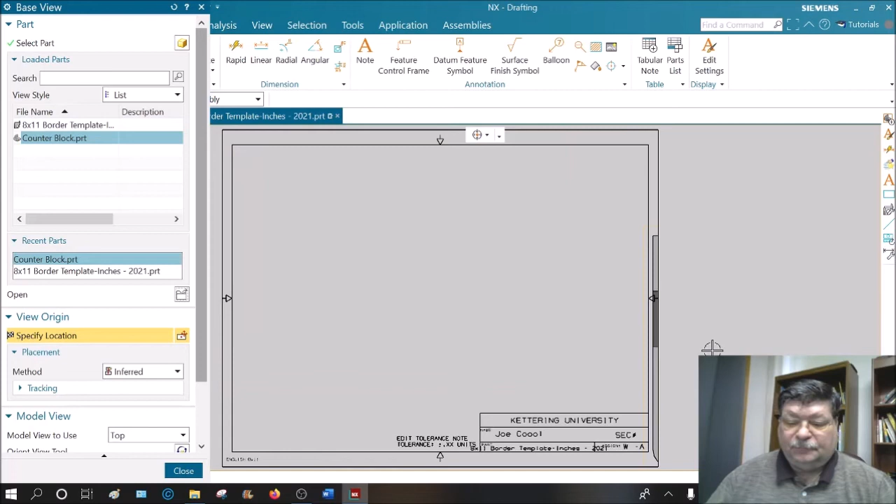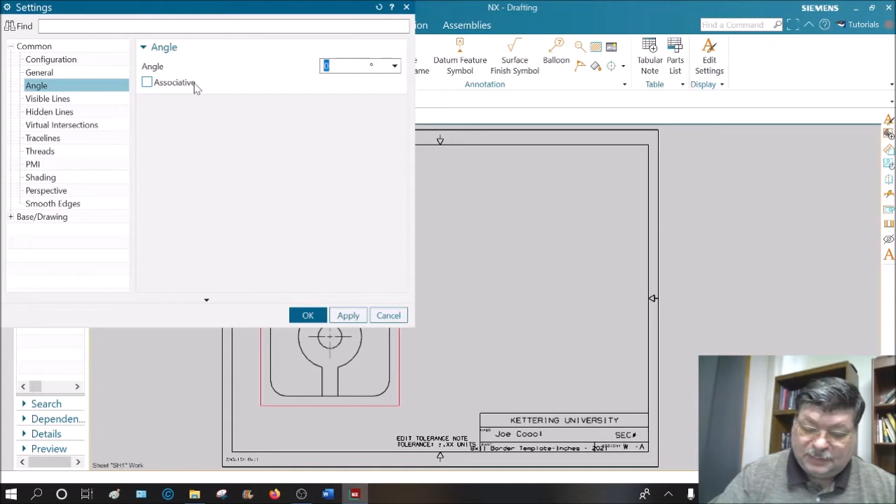Now it's vertically oriented and a little bit too large. I'm going to click to drop it, escape out, then I'm going to double click on the boundary here and go to angle, rotate it clockwise, which is -90 degrees, and then I want to make it somewhat smaller so I have room to put all my dimensions on it.

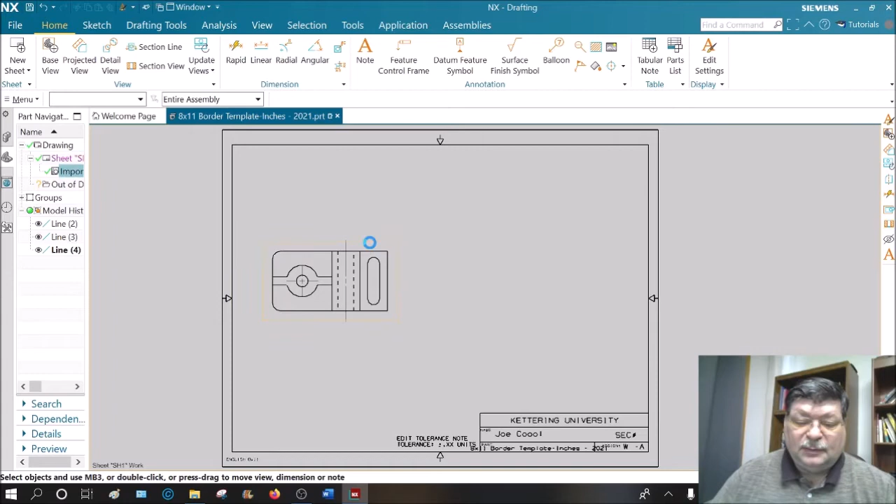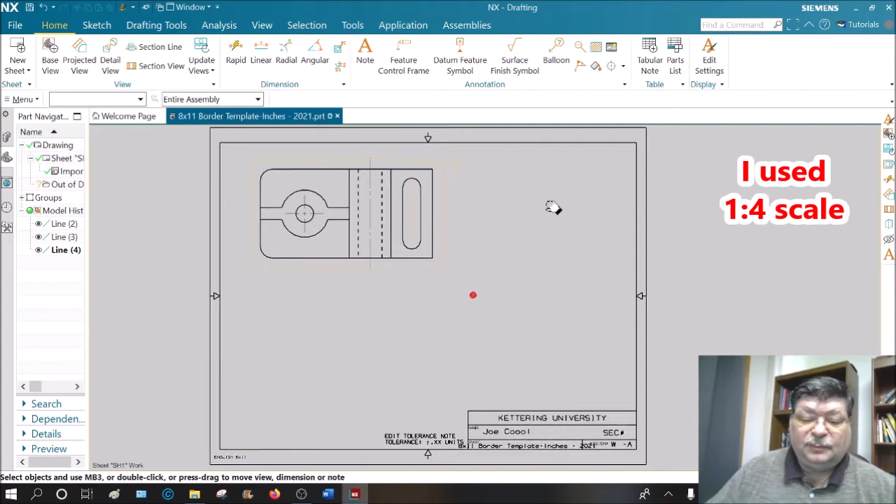So we'll go to general scale. Let's try 1 to 2. That's too small. So we'll go to the ratio setting and pick something in between. You can always scale it down after you put dimensions in, unlike in previous versions of NX when that'd mess up all your sizing. So that's the size we want.

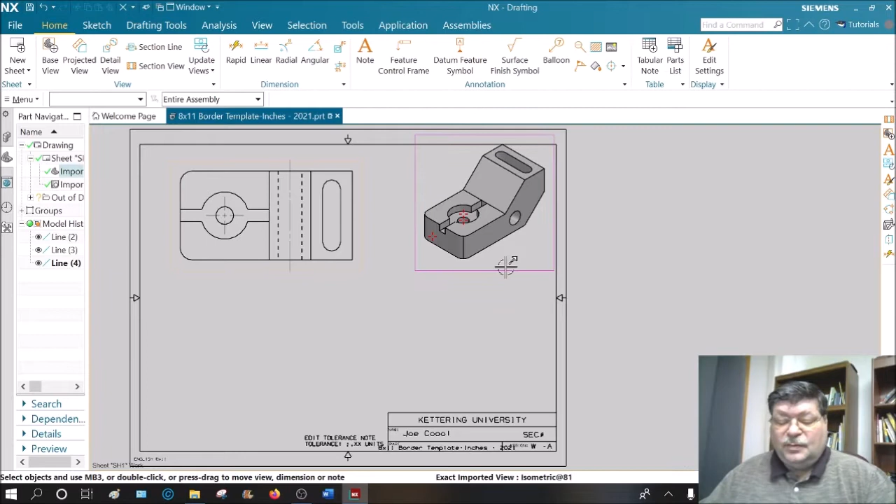Just for chuckles, we can bring in the isometric of it, and to get the center lines off, click and drag a box around the whole thing, hit your delete key. There we go. You may notice at times that you get these edge lines that really shouldn't be there. There's no corner or anything there. You can delete those by right clicking and hitting the little eyeball here, the hide symbol. That looks a little better. You could actually do that to any of the lines.

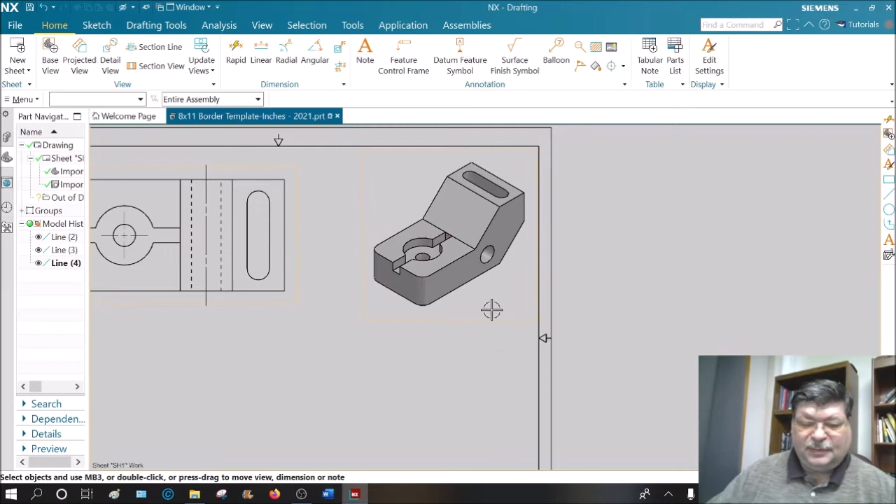Normally the isometric comes in fairly accurately, but there are some problems depending on how you create the part. At times you may or may not get a line and a curved edge. It comes in with center lines. This center line is not quite big enough. Let's double click. We want that center line to be as large as the counter bore.

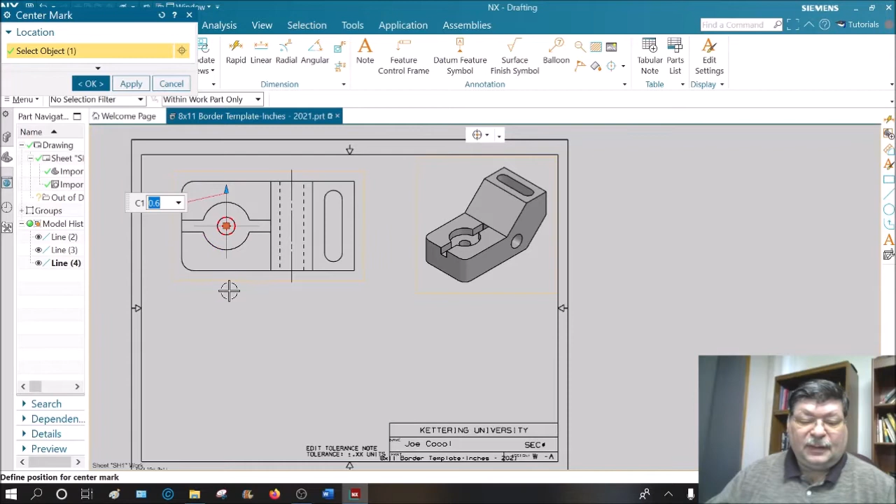And there are no center lines on this slot because it doesn't put center lines in for arcs. So we're going to go to the center line command, go to center mark. You can do more than one at a time. If you do more than one at a time, it connects them. Okay, so there we go with that.

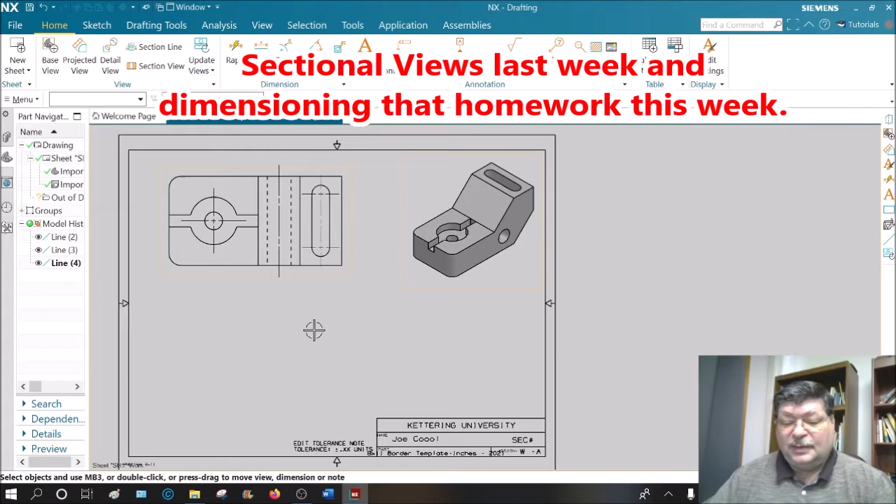And now, since this is a sectioning chapter, you always want to figure out when the part is done, what's the fewest number of views and the best views to use to show this in order to dimension it. If you don't know, you can put a bunch of views on there, use the best views to put your dimensions in, and any views that you didn't need to put dimensions in, you can delete them afterwards.

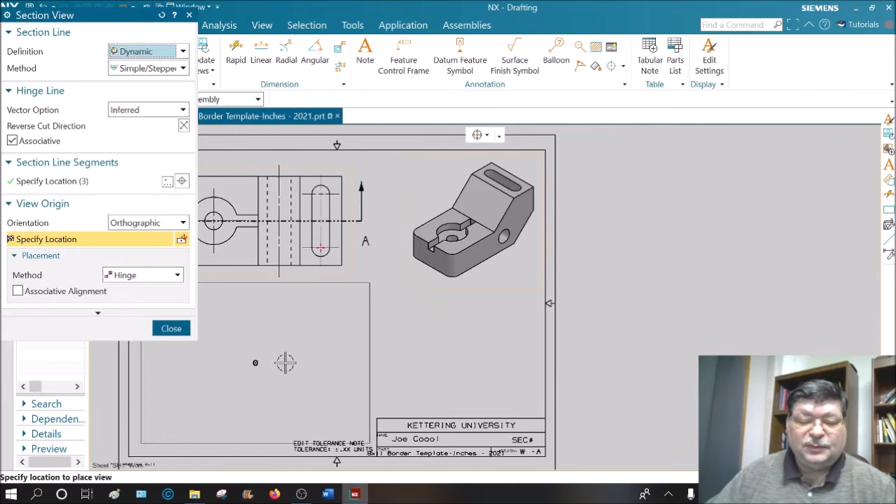We're going to go to the section view command and just put a full section through the whole thing. Click to drop it down here. This shows my internal parts and my external. You're not supposed to dimension to hidden lines, so no hidden lines in this view. Let's move this down a little bit.

Here's my tolerance note. The tolerance note was put on your template to remind you to put a tolerance note in. So let's double click on that. Let's get rid of the top here. We don't need the edit tolerance note reminder. And the tolerance should be no preceding 0 for inches, as explained in the video on the basics of dimension placement.

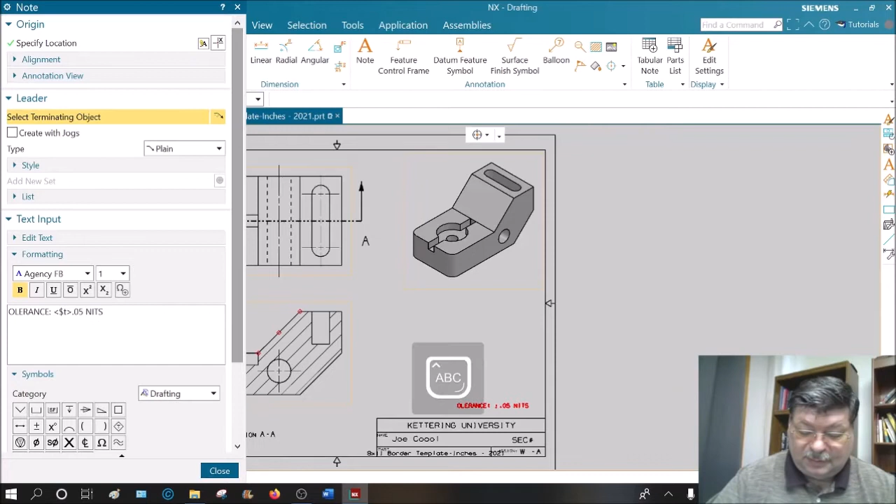Typically with inches we have 2 significant digits, and this shouldn't say units, it should say inches. So there's a good way to put a tolerance note in. The letters for the cutting plane line should be near the arrowheads.

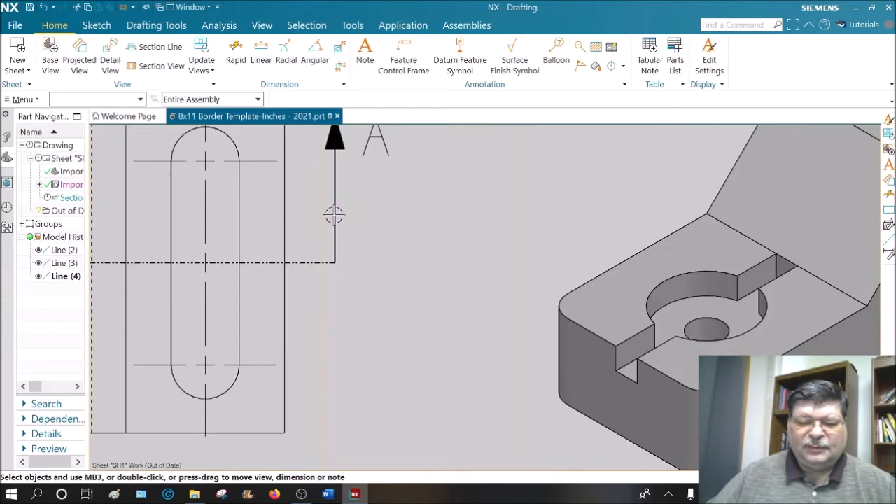And you can move it if the arrowhead gets in your way. You can double click on it, and that little yellow dot there, you can click and drag it and move this in and out, so get it away from any other dimension lines. There's a way to shorten the arrowhead too. I forget, you might have to double click, right click, maybe go to settings, probably in there somewhere. Lots of changes you can make. We might come back and move this if it gets in our way.

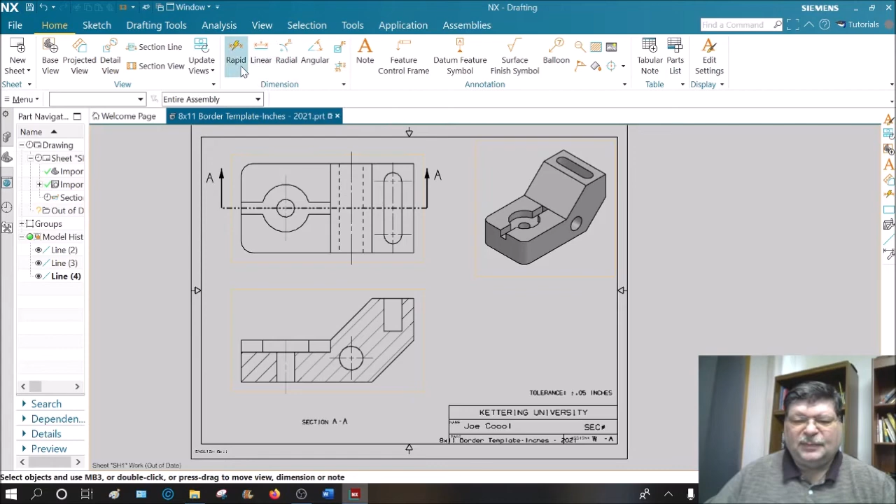Okay, let's put some dimensions in. So we should start with, here's our rapid dimension. A rapid dimension will do a normal linear dimension that's horizontal or vertical. It'll do angular or radial or diametral. It'll do all of these depending on what information you give it. Sometimes it won't want to snap or click or give you the correct one, and then you'll have to force it. So there's a couple ways to do that, but we'll use the rapid most of the time here.

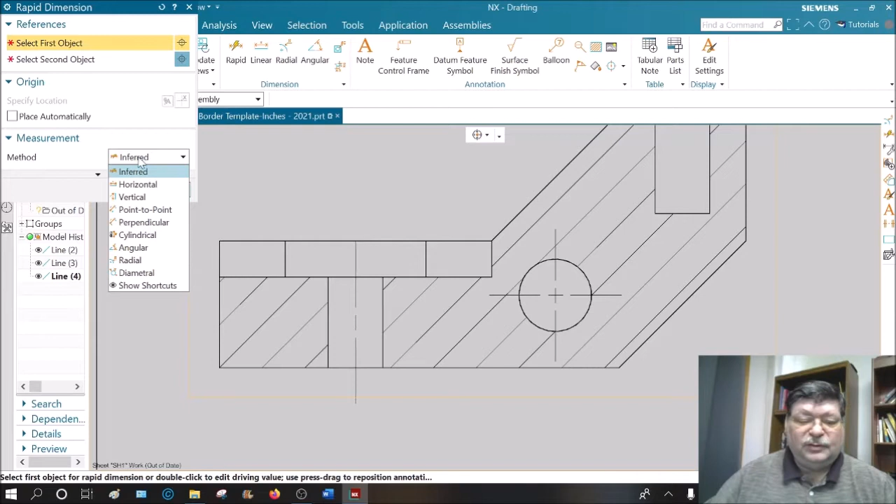Okay, we need to put the height here. So it's on diametral by default from last time I used it. This should be on inferred. Okay, this is how you can change it if you want a radius, even when it's trying to give you a diameter, then you can change the method here. Usually you want it on inferred. So I'm going to click here and here. You click where you want the gap to start. Okay, the gap size length has already been predetermined.

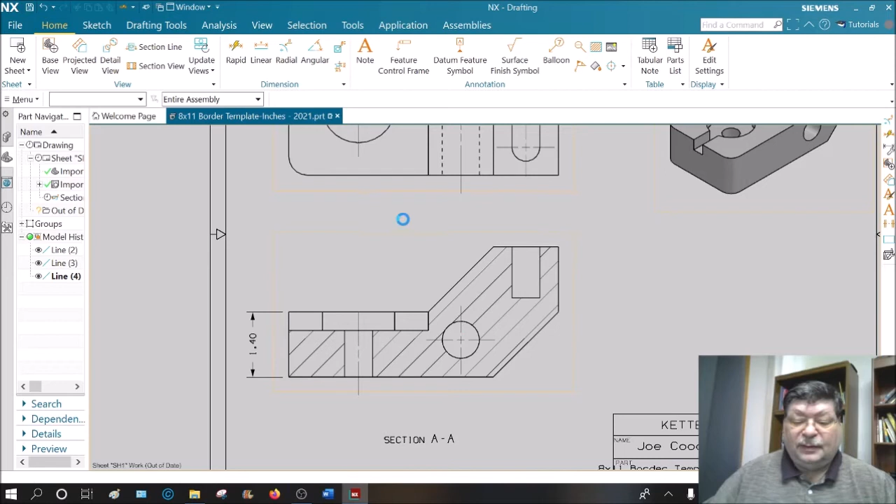We're not going to put the height of this counter bore here because we're going to put it in the note on the top. This just happens to be the same height, 1.4 inches is over there. This corner is at the same height as there, but we don't put it there. No, we don't make assumptions with dimensioning. So that's the height there. We do the length of the bottom here.

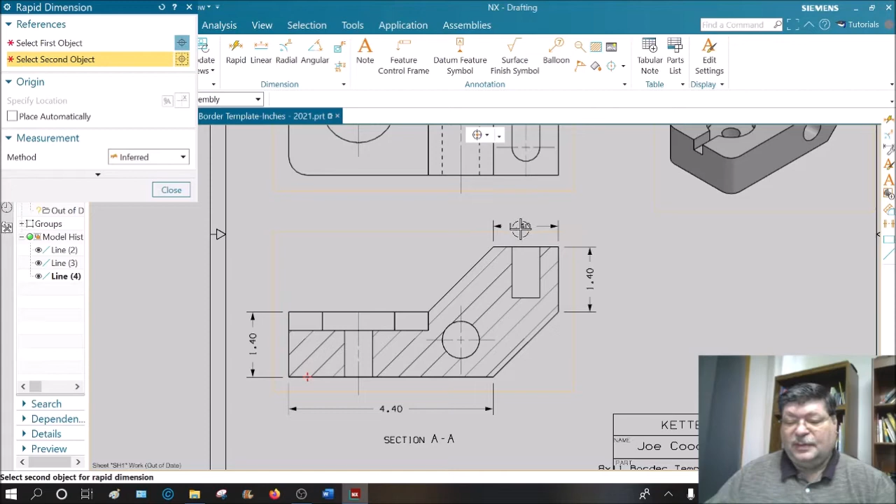Now to do an angle, you can either identify both edges of the angle, and that identifies where it should be, or you can do the length to one edge and then do an angle of that line, and then you wouldn't need the top dimension here. Let's see, we also need one here. I would put this dimension in instead of across the top view, because this is on the contour where you can easily see what you're actually dimensioning across. And we need a dimension across here.

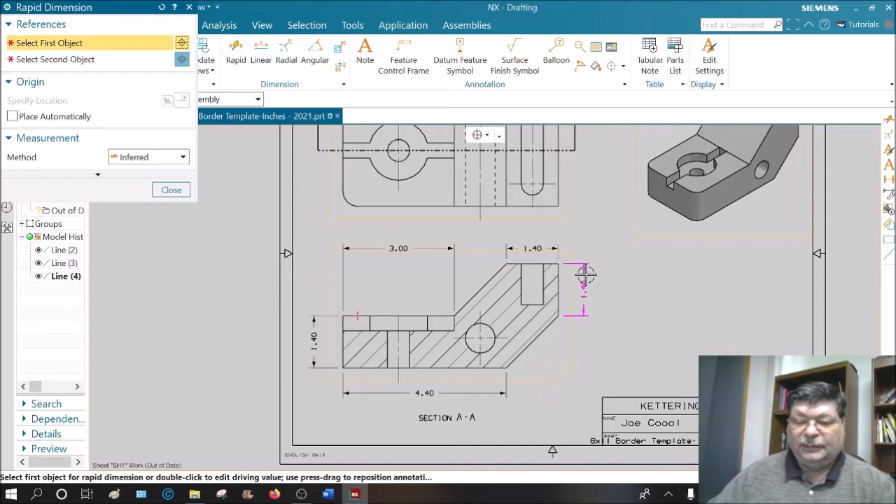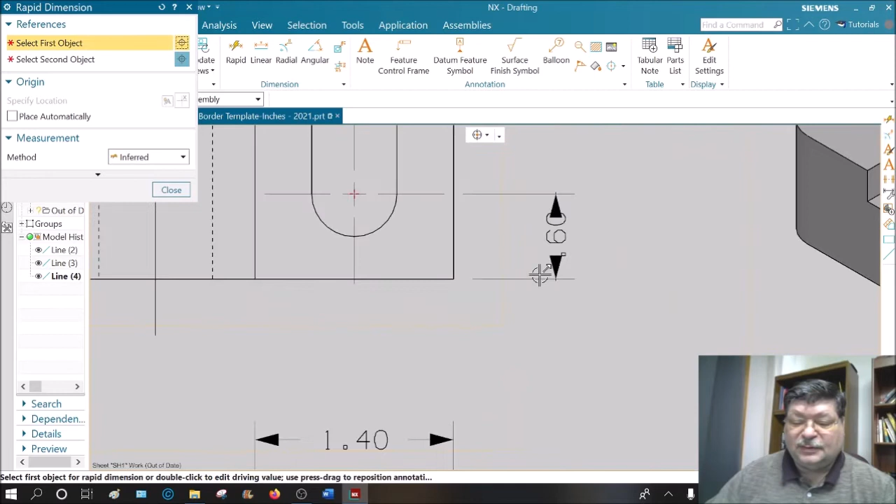Usually these dimensions are lined up, so if you go over there, you can click on that, not click on it, it'll automatically link to it, and then you can move your dimension back. Usually you want the dimensions lined up unless you need more room, but make them neat. Remember, dimensions are there to be easily read and understood. Remember, you're locating and sizing every feature, so the slot here we have to locate and size it. So we're going to locate it by arcs; centers of circles are always located to the center of the circle. Okay, that dimension is a little crowded there. We'll come back and edit that later.

Go to the center line here. The center line is also on the midpoint line, so either one will work. Again, that's a little crowded, but we will come back and fix that later. We could then go from, we have to know the other point here. So there we go. Now notice this window comes up. This is like a small editor. And it comes up when you just hover for a few seconds, and then you can add features to this. Just ignore it if you don't need it, but if you want it, we'll get to something when we need it in just a minute here.

Okay, we also want to locate the center hole here. Now, this hole looks like it's centered from top to bottom, but we don't take anything for granted. So let's go from here to here. This isn't exactly how it was dimensioned in the book. They said 0.2 between the center line and this edge. Remember, in the book they were just giving you enough dimensional information for you to model it. So we're going to go from the outside edge to this edge line, and then from the outside edge to that line. Subtract the two and you have the distance across.

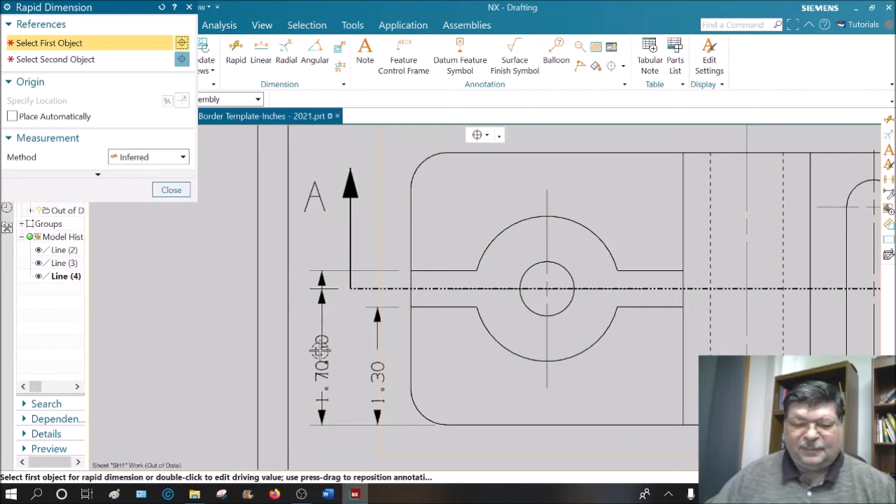I'm just going to drop it in here anywhere. Sometimes it doesn't like to, it wants to click on some other dimension. If you just drop it somewhere, you can move it later. There's a way to turn off this snapping function, but I'm not sure where that went in these later versions. So just zoom in and be careful with it.

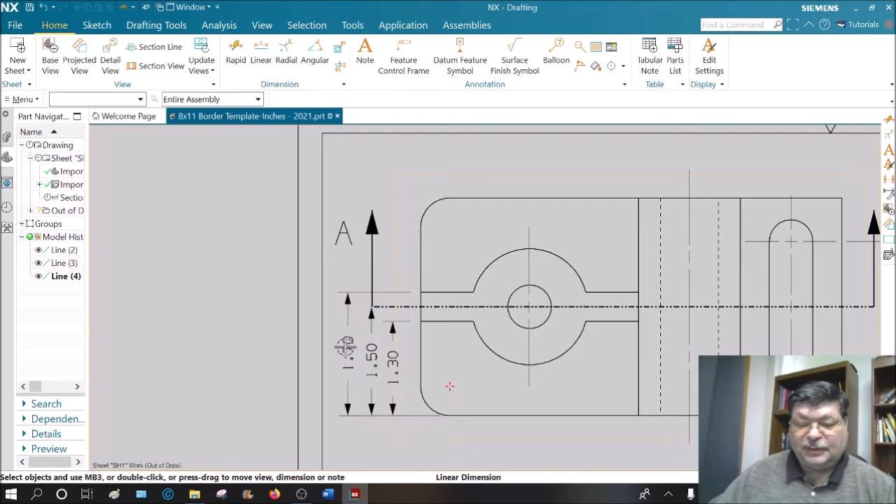There we go. Usually the text is centered between the arrowheads. The first dimension out from the side should have some room, shouldn't be crowding the object line. Then you should stack the other dimensions, fairly close together, and be uniform in their placement.

We actually have 3 lines here and 3 gaps, and this extension line is too close to that arc. If you zoom in, you can see the gap, but when you print it out or zoom out, it looks like it's touching. So we're going to fix that right now.

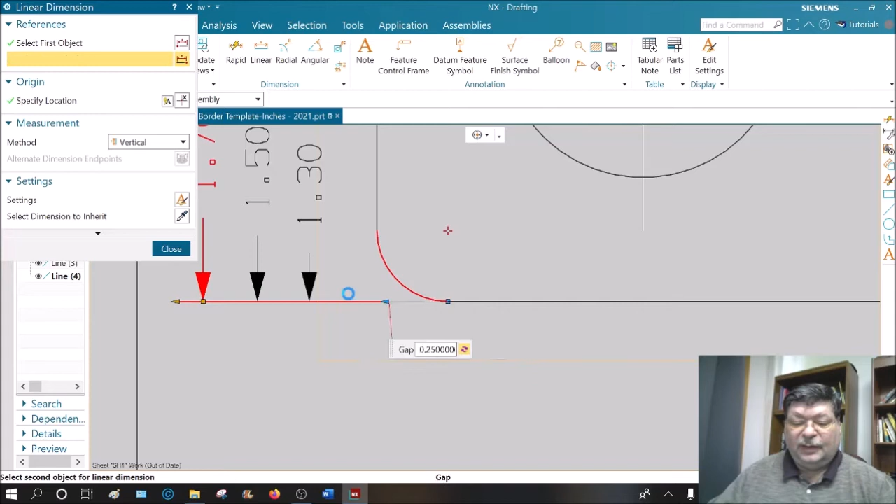We're going to double click on the line, then click on the square dot here, and then you can take the arrowhead and move it out. We're just going to move it out here because there's another line underneath it. We're going to do the same thing for the next one: double click on it, click on that, and just click on the arrow.

I love these editing features that are graphical.

The last one is there, and we're going to double click on that and click on here. Now really we don't need to move both. If we move this one out, it moves the other one too. We don't want to move both.

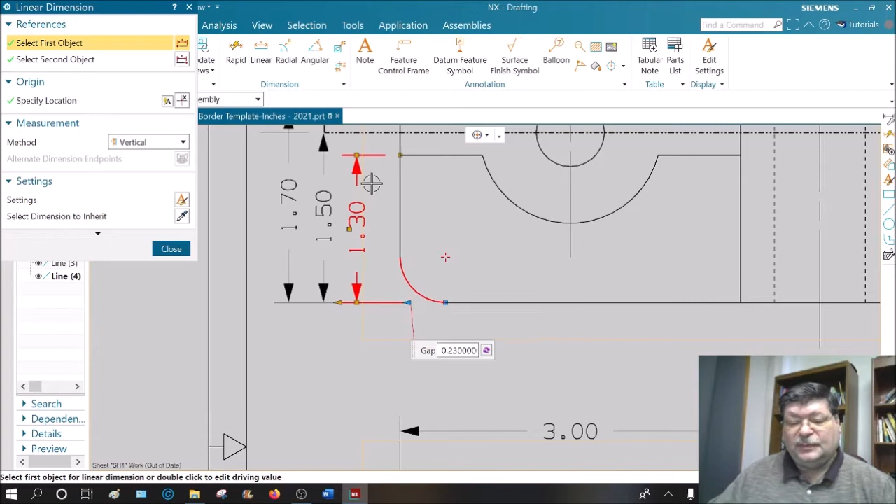So there's this thing here where the gap has a synchronize both sides button. You want to turn that off. Turn it on, turn it off. Okay, and then it should just move one side, so that the gap here from the curve looks about the same distance as up there. And then you can close that.

So it's nice to be able to edit that in real time. What is that line there? Oh, okay, why I did that. Let's double click on that.

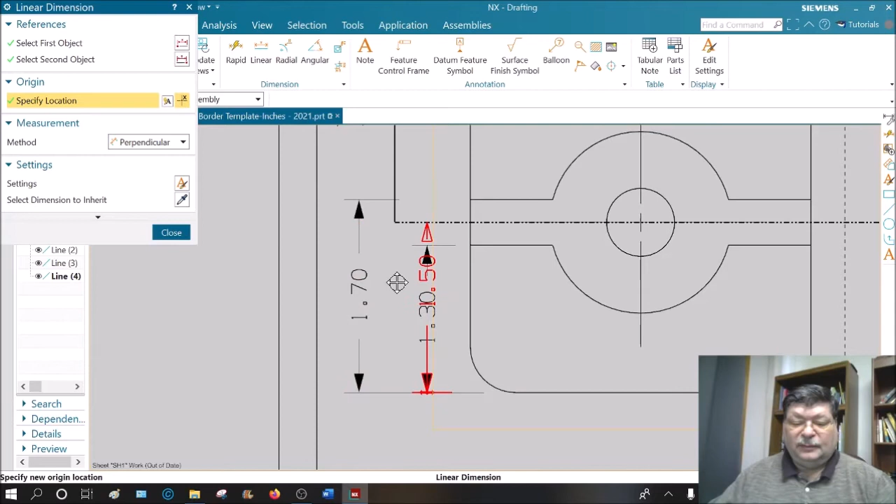Don't know why that moved that way. I'm just going to delete that line. I don't know if I moved it. Oh, I see. Okay, I'm just going to delete that and put it back in. Sometimes the easiest way to edit something is just to delete it, especially if you don't know how you messed it up to begin with.

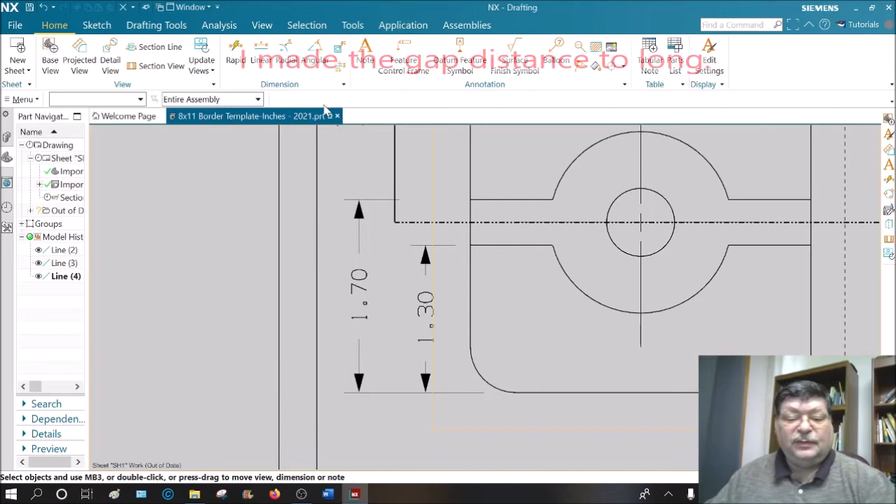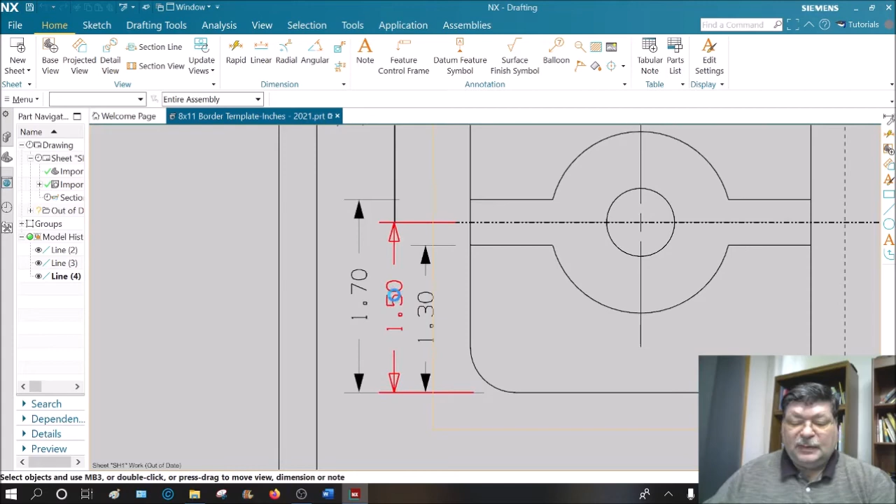So let's try it again. Let's try there to here. And we got to move that one. There we go. Neatness counts, people. Neatness counts. Easy to read, easy to understand.

Okay, we need an overall dimension. You start with the smaller dimensions and you keep going outward until you get larger and larger, until you get an overall width, length, and height. So do we have an overall height? No, we do not have an overall height yet. So let's go from here to here and give it overall height.

Oh, I'm missing a center line here. So let's go to center line. That's a 2D center line. We can go from curves, okay. Pick 2 lines, it puts a center line down between them. Don't let that center line hit text - if you need to move it, shorten it.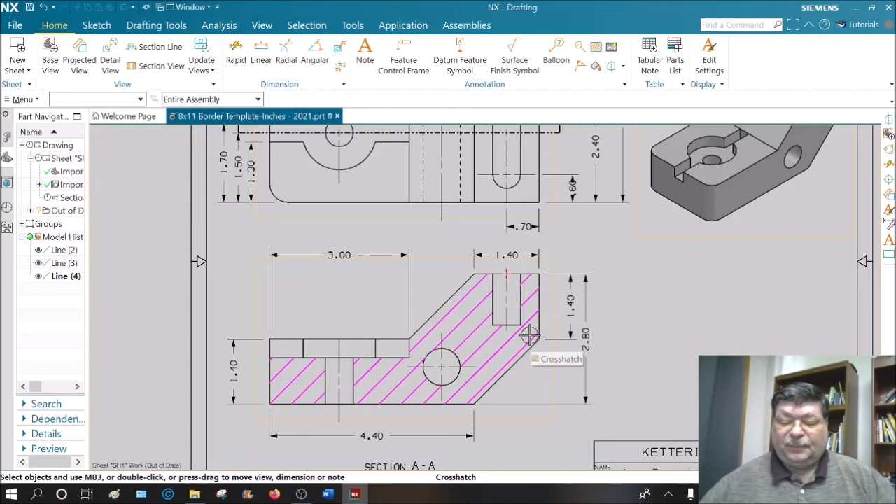Okay, we need to size and locate this hole here. So let's locate it. Highlight the center line and this edge. We'll drop that dimension in. And then the height of it, typically you take the dimension and move it out to the nearest outside edge, instead of dragging it all the way through the part over here. That probably wouldn't be too busy either.

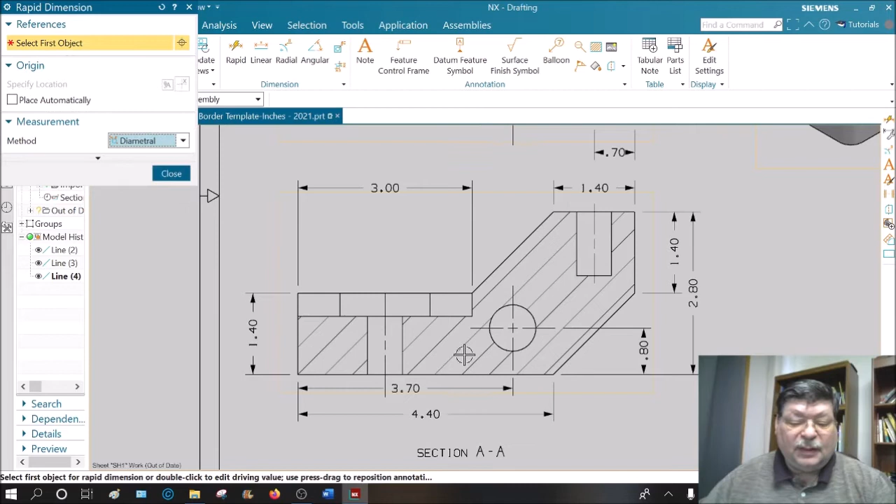And then we need to size it. So to size it with a rapid dimension, if you just click on the arc, it should do a... I'm going to go diametral. Usually I like to just have a leader line pointing in and not a diametral line pointing across, because if you get several of these things in one spot, it looks kind of weird. Let me try that one more time. Diametral inferred - okay, that's what I usually want right there.

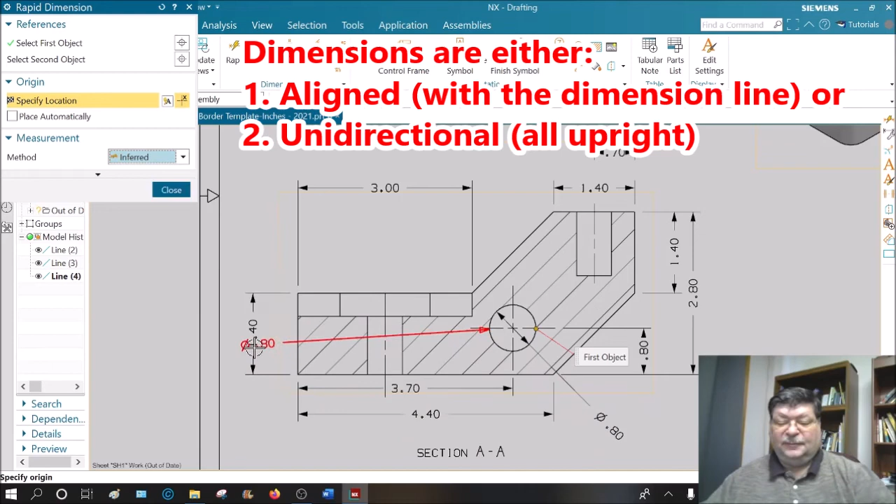Now I'm going to show you how to use this little editor here. By default, your text is either unidirectional, which means it's all upright, or it's aligned - vertical text, horizontal text dimension lines, and the text is horizontal or vertical like this. If you have vertical text over here, then it's angled, so the bottom of the text aligns with the leader line too, and we want to straighten this out. So we're going to go right here to text align and make it horizontal text. There we go.

Click to drop that, escape out. We can delete this one then.

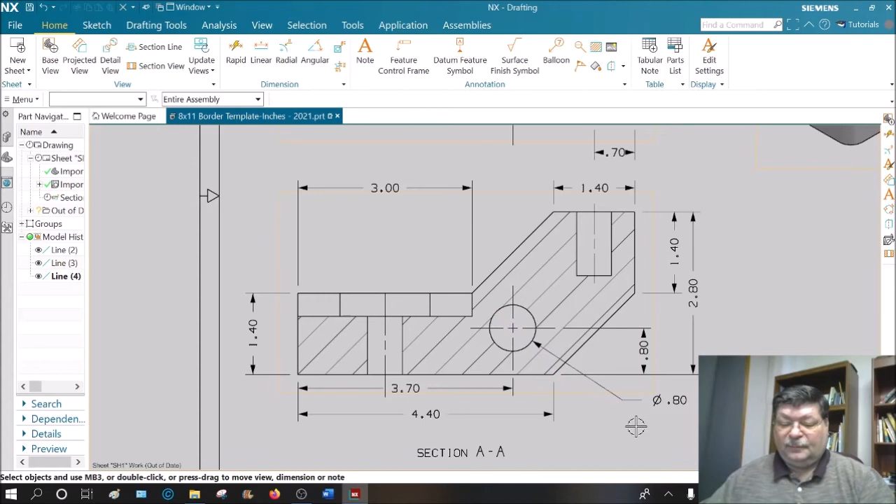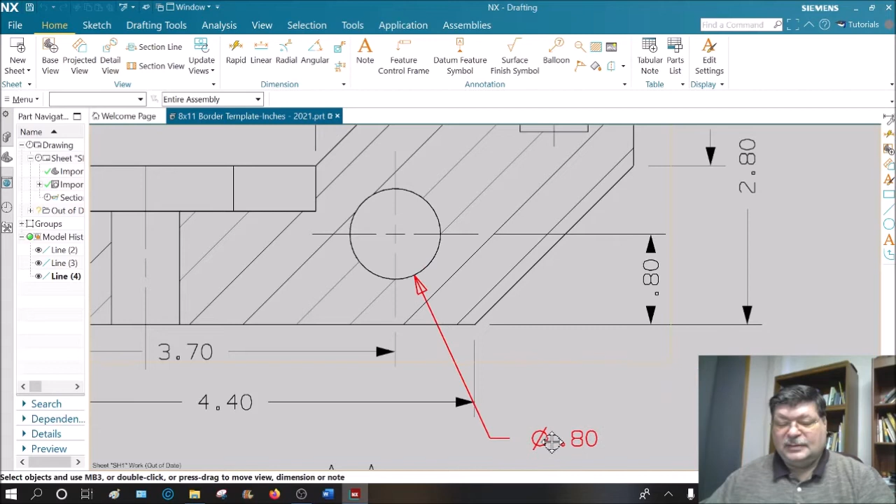My little stub line here, maybe I have that adjusted too long. If you double click on this, you can click and drag this in, but where it's set is okay. Remember, your leader line can cross an extension line, but it's not supposed to cross another dimension line. Put it somewhere where it's easy to read. There, we've sized and located that hole. We have not sized this slot yet, so let's do that.

Let's click. Do we want a radial for that? Yeah, let's do a radial. And then we want to go up here and straighten it out. In front of this radial, hover for a second, go up here. In front of this is the text. The x.xx represents the text. And we want 2 of these, so 2x. If you need more significant digits, you can change this value.

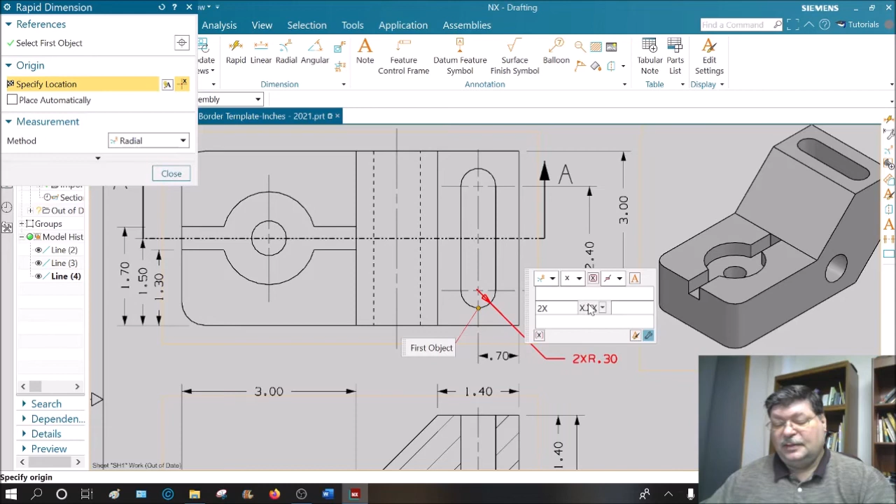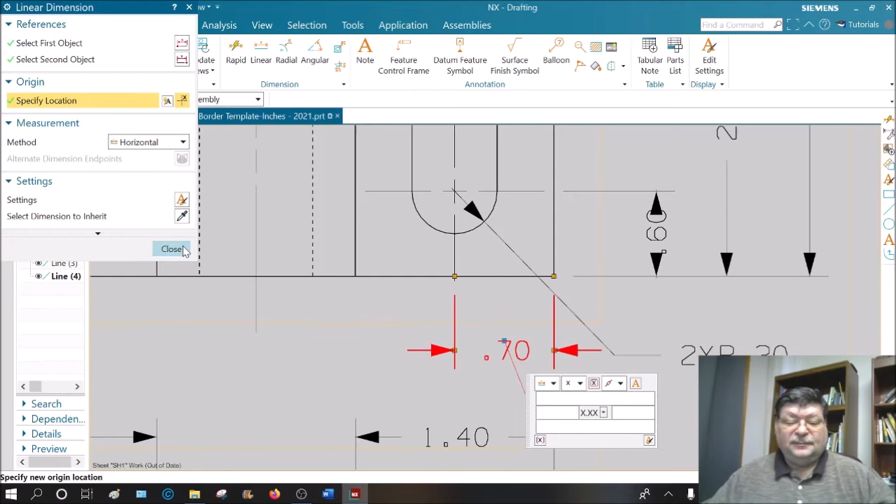Now let's make this a little more legible. There's 2 ways to do this. Double click on that text. You can either right click on it and say text or arrowhead orientation out. That gives you a little more room in between the extension lines. Or you can click on the text and move it outside. Typically, if you want to move it outside, you'd have the arrows inside though. Okay, so since I have room inside, I usually like my text inside the extension lines.

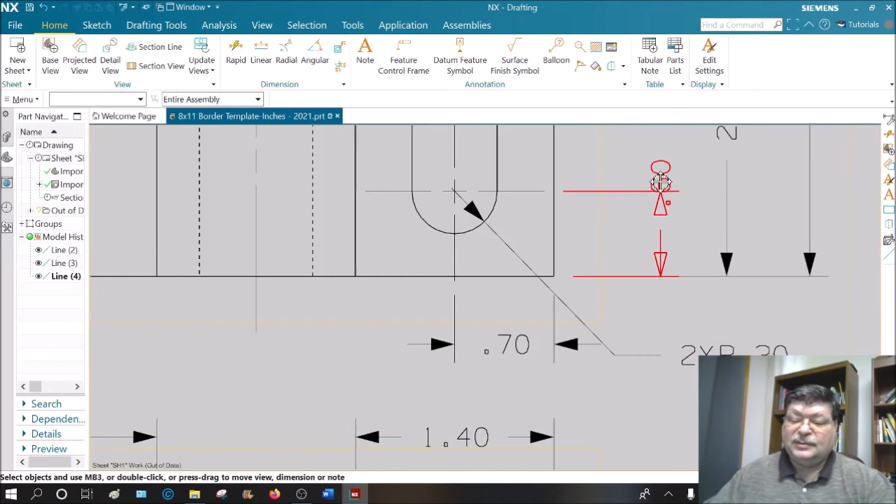Same thing for this one. For this one, the other option is to take and move it to the outside like that. That's okay also. Okay, now we can move this in a little bit. Move my text nice and neat. Move my arrowhead where I can see it.

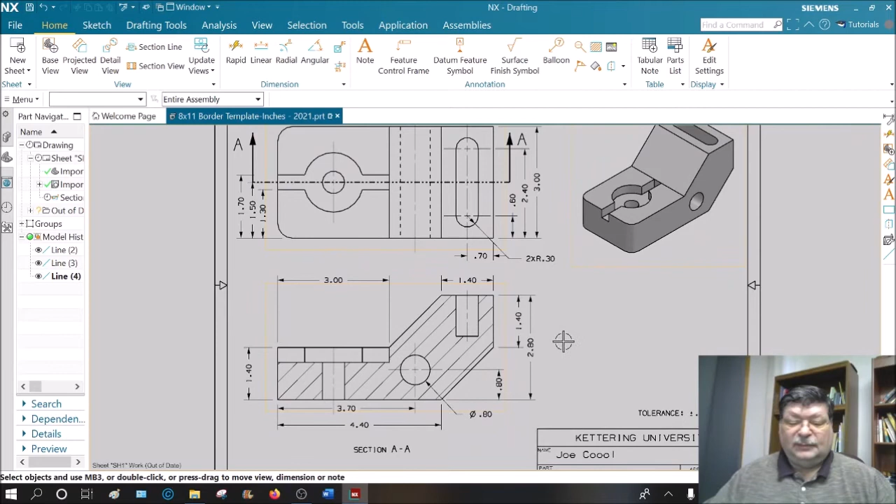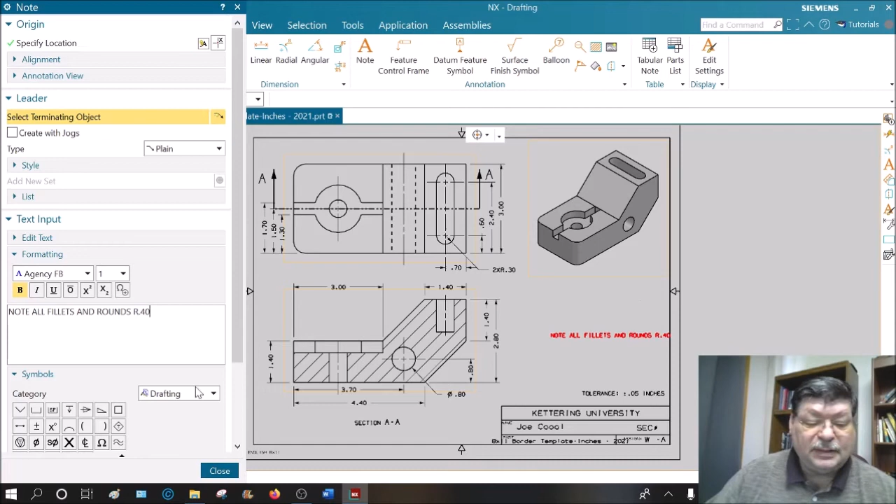Am I missing anything? Is there any feature that I do not have there? Oh, okay, the only thing I don't have is these arcs here. So instead of dimensioning it, I'm going to put a note in like they showed in the book. And the note is going to say, all fillets and rounds, radius 0.40. I think that's what it was. Let's say that's what it was. There, so now you have a note.

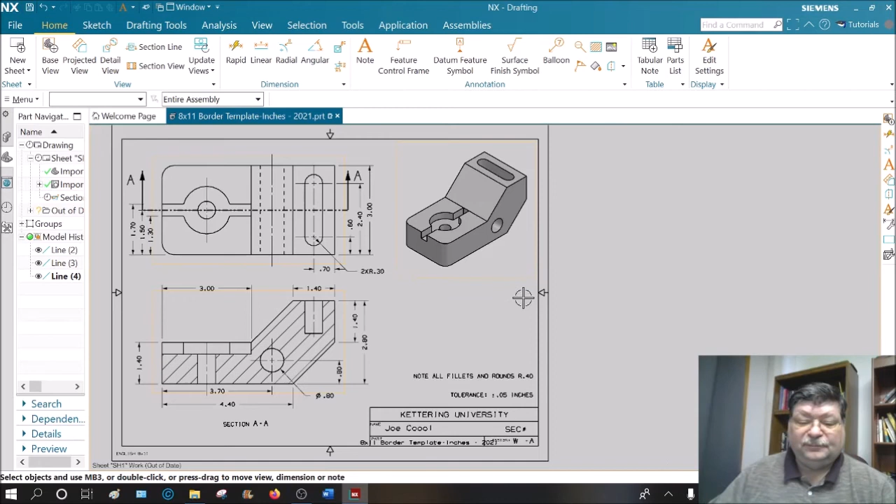So a fully dimensioned drawing shows pictures, shows dimensions, shows notes, shows tolerance notes, and anything else about the part that you need to let the person know that's going to build this thing. Like if the part has to be made out of a particular material, like aluminum or stainless steel, you'd put the type of steel, material, and list that. If it's painted or has decals applied, you can even tell what the font of the letters on the decal are. Okay, so anything that the person needs to know should be on this drawing. This is a working drawing, a legal document that should be complete in and of itself, or reference other sheets it may need. So that's what your drawing should look like.

Yep, I'm going to move this dimension down a little bit. That boundary line, that yellow boundary line, never prints out, so don't worry about it, you can ignore that.

There we go. Now, are there other ways to dimension this? Yes, there are. If I had another note here, let me put another note. Let's say I had more than one note, so I could say note 1, and then note 2. If I said the part is symmetrical, part is symmetrical about cutting plane line. Okay, what does that tell us?

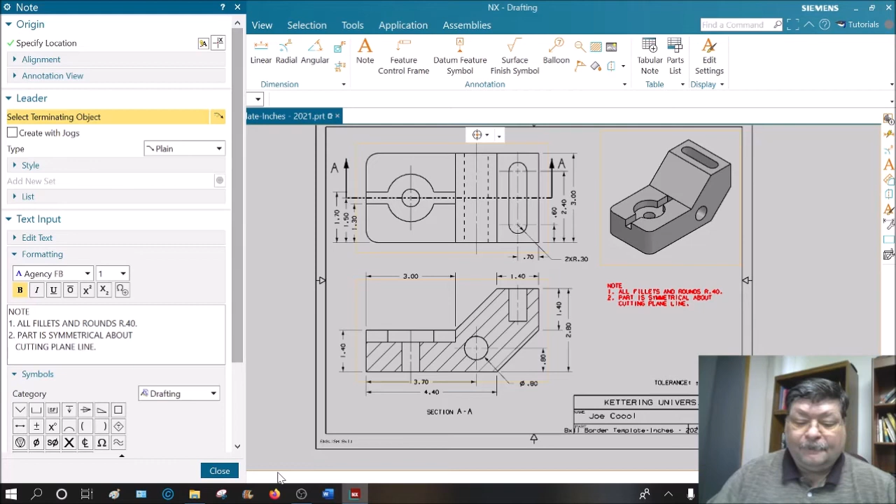That says the part is symmetrical about the cutting plane line. Well, here's the cutting plane line. That means that it's just as far to this side as that side. Now, what that tells us is that the part is symmetrical, which means the hole is in the center of this plane. If the hole is in the center of that plane, top to bottom, then I don't need this dimension because I know it's halfway through and it's 3 inches wide.

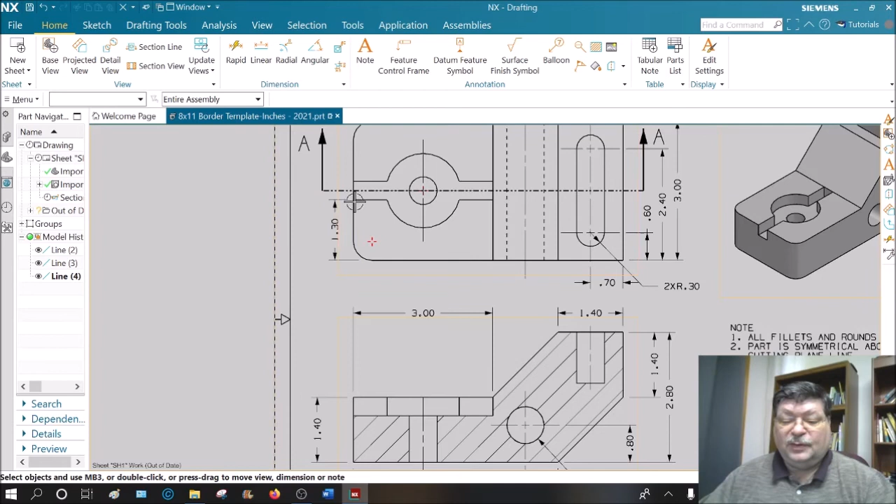I also don't need this dimension, because if it's 1.3 inches to this side, it's also 1.3 inches from the top side there. I also don't need this dimension, because if it's 0.6 to this arc center, it's also 0.6 from the other arc center. And if there were more features on this that were symmetrical, you can see that just having a note can keep me from having to put a lot of dimensions on if it was a lot more complicated part.

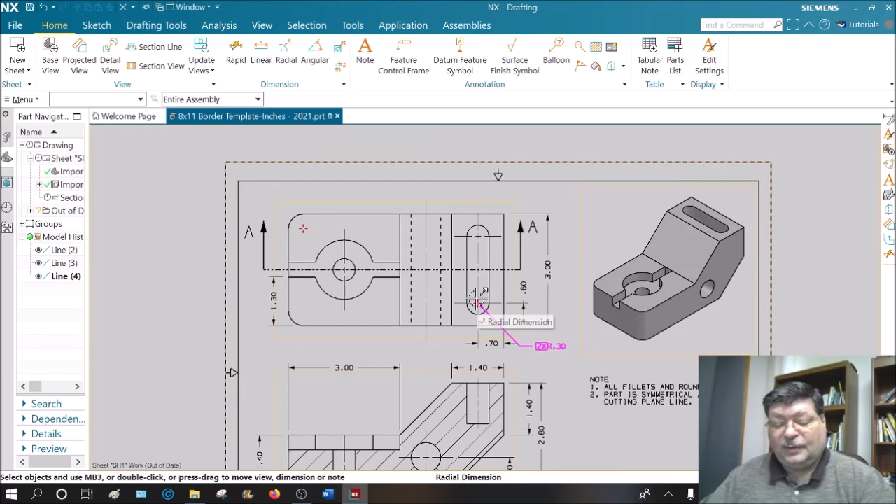So notes can be very handy.

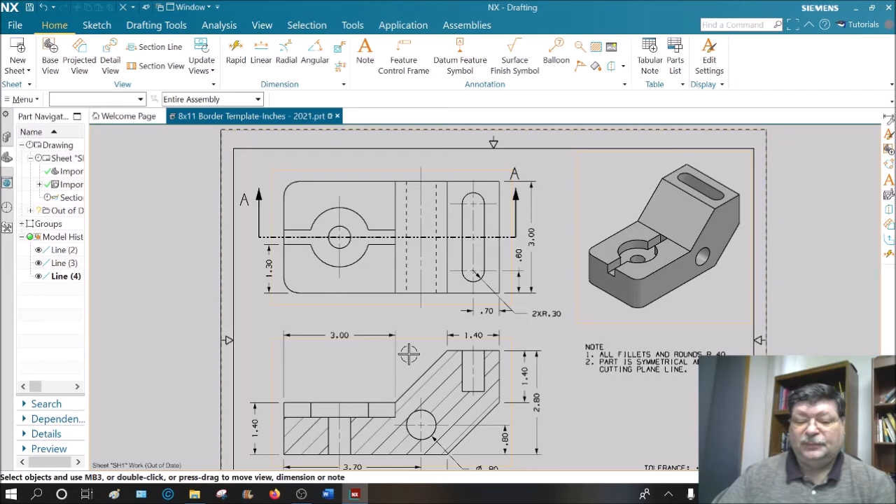There's no one right way to do dimensioning. As long as it's clear and gets the information across, it's okay. When a person wants to build this part, he should be reading all the dimensions, he should be reading all the notes.

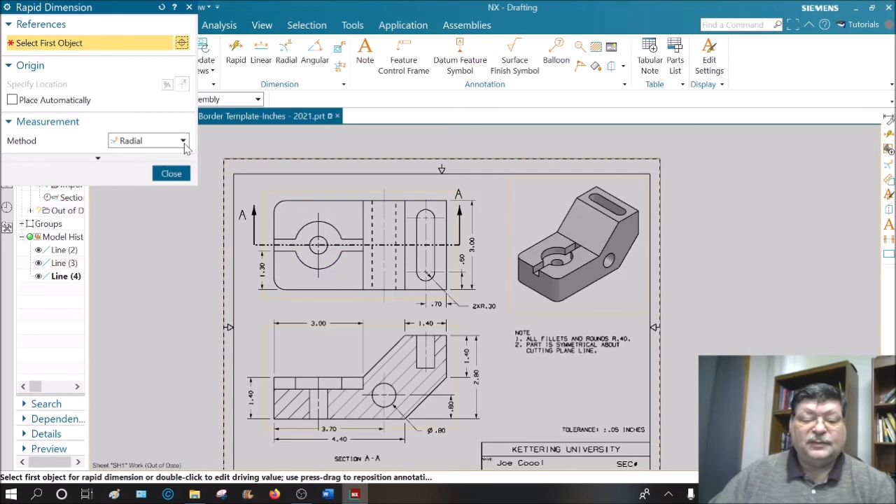Oh, we're missing a couple more dimensions here. We're missing this hole in that counter bore. Because there's no line across here, we know that the counter bore is the same depth as this slot. So if we put the depth of the slot in, we have the depth of the counter bore, and vice versa.

Let me go inferred. We're going to put the dimension of this in here. And I'm going to go to straighten it out there. And then I'm going to go to the full editor now because I need some symbols. So this is the small editor, I call it the small editor, I guess. And this is the full editor.

So in the full editor, when you open it, probably the symbols will be closed here. You can do different things here. Formatting, you can make it bold. This is how you change the size of the text if you want to change the size different. It's scalable. So right now it's at 1. If you want to make it double size, you say 2. All the text should be the same size.

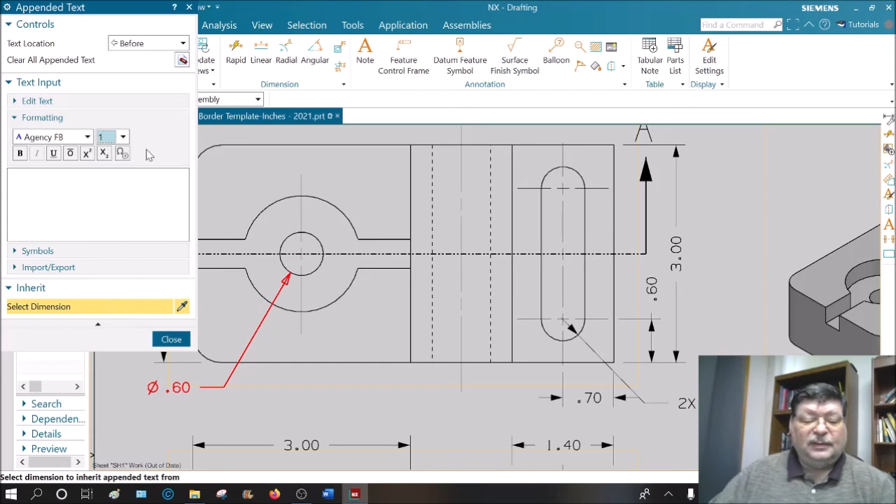The only time you want to increase the size of text is if you wanted to put the say top view here, put the view title. The titles are usually bold and they're a little bigger than the rest of the text.

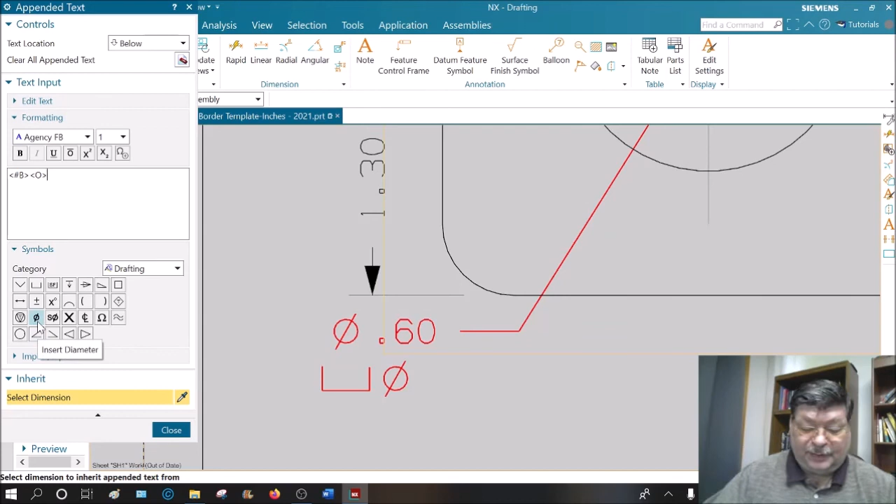But what we're going to do is here we're going to add, this is called appended text. This is the text, the dimension, and then anything you add to it is called appended text. So we're going to go for the appended text, we're going to say below it, and then we're going to type in what we want. And we want a symbol for counter bore and a diameter. And that counter bore diameter is 1.60.

Probably how they would create this part is to drill the first hole, 0.60, drill it through, then put a counter bore, and then somehow cut the slot in. A CNC machine could do that.

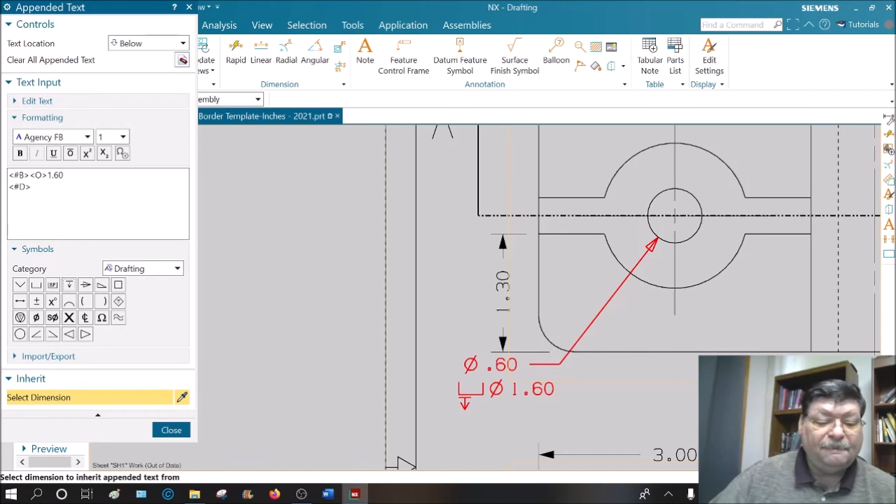Okay, we're going to do enter here, and for the second line of appended text, we're going to say depth 0.40... 0.40, and say close. And then position this thing where it's not in the way.

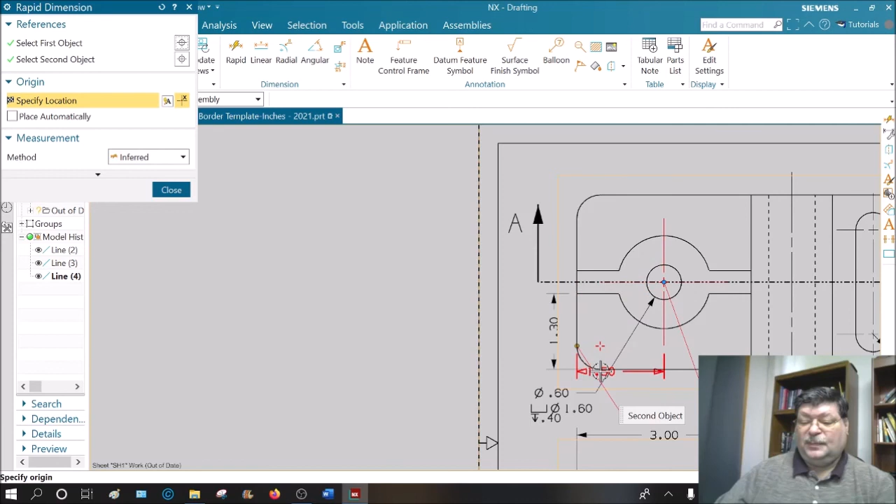We also want a dimension from here to this center line, because we can't assume that this hole is on this plane halfway from left to right. It looks like it is, but we don't make assumptions.

Okay, now we got a crowding problem here. So let's move this over here. There. If this is in your way, you could move this down too. You want it easy to read and understand.

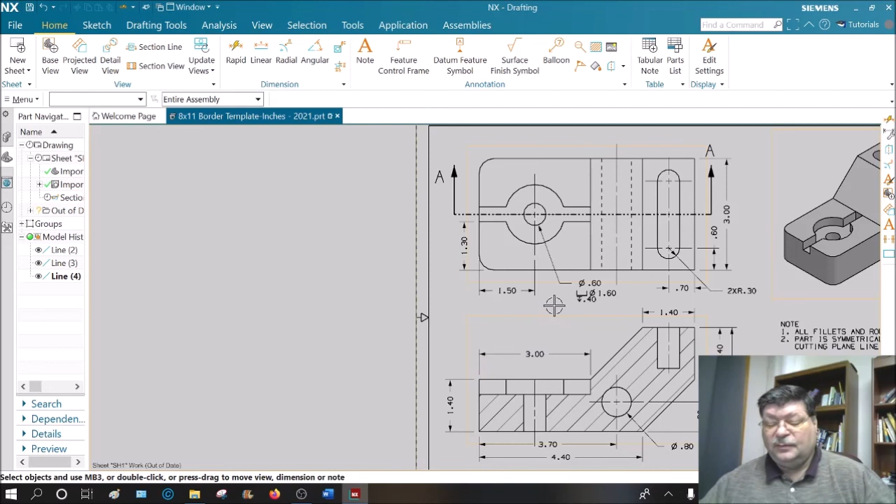Okay, we have the depth of this counterbore, so that we don't need the depth of this now because we have the depth listed there. There. Don't forget to change your title block here.

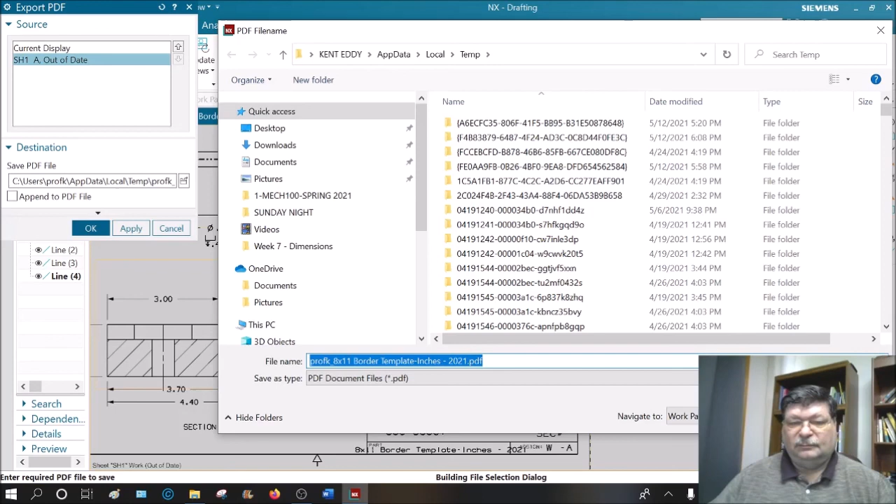Okay, just to make these videos a little bit shorter, I'm going to create the taper collar in the next video.